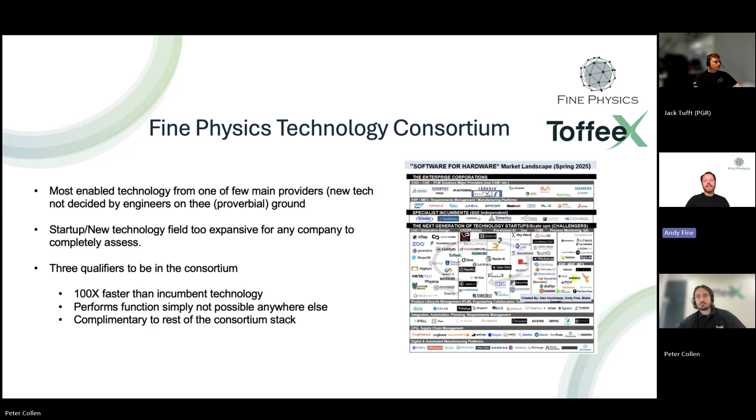And there's three qualifiers, which I'll be very clear about. A, it has to be 100 times faster than any incumbent technology; it has to perform a function simply not possible anywhere else, hence this is where ToffeeX fits in; and it has to be complementary to the rest of the consortium stack. So three very simple qualifying criteria for the consortium, and we at Fine Physics actually help curate some of this stack and cut out some of the noise within this.

So product development optimization. This is something that I personally have been working at for nearly 20 years. And I'm just going to guide you through this chart that you're seeing in front of you. So at the very bottom left, where we have an inefficient technique and small geometric design space, we've got make it and break it. This is what we've been doing since prehistoric times. Now, over the past 20, 30 years or so, we've done more and more work on direct physics modeling. So here, for a single design space, you can have a pretty efficient way of doing analysis using either CFD, FEA, electromagnetics, whatever it may be.

I'd say 10, 15 years ago, we were doing parametric optimization. So we were limited to maybe 4 or 5 parameters. You could optimize the system for a set of targets. Things have come on a long way since then. So we've been able to do reduced order models for quite a long time with multiple parameters, but you still need a lot of expertise for that. You can have a mid-design space, and the technique efficiency is okay.

Now, most recently, the last five or so years, there has been AI surrogate optimization. This is the deep learning side. Now, there you can explore a big geometric design space, but the efficiency of the technique is pretty poor, if I'm honest. You need a lot of training data and a lot of effort going into that.

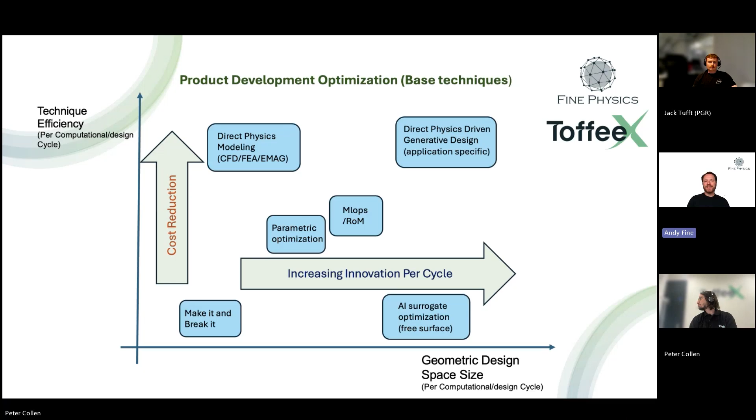And this is where we come in at the very top here, which is the direct physics-driven gen design, or the topology optimization, which we're going to go into here. Here you can have a large geometric design space, so many changes. You don't need to parameterize the system, and you can go through a significant amount of design iterations in a very short space of time. Hence, this is the area we're going to talk about here.

So just to look at a little bit of a breakdown of that, a little bit of a timeline here. So we went from making it, breaking it, to the empirical formulations, where we had Newton, Einstein, and so on. And it was really in the 1980s that we had the direct physics modeling.

This is when the codes were coming out of NASA and other bodies where you could actually do mathematical modeling, and there was enough computational power to actually do this. That led to parametric optimization at the end of the 90s and early 2000s, and that's the way a lot of things stayed. Whilst we boosted computational power, we could do a few more parameters and so on. And then in the 2020s, we had this AI boom and AI surrogates and so on, but we're coming kind of over the curve in that one.

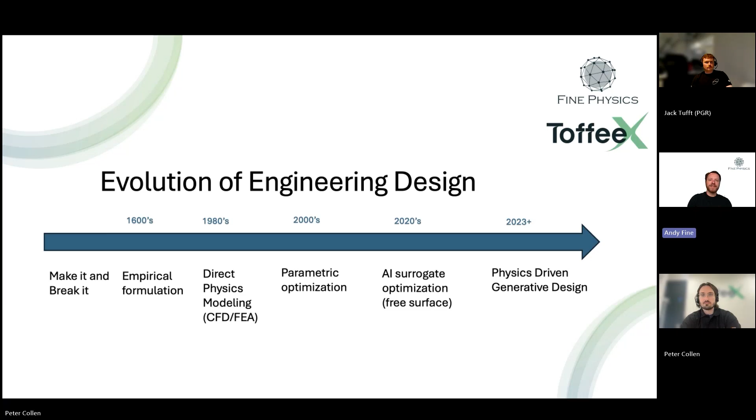So there's the hype of AI can do everything, and then the realization that you need to feed AI with a lot of data. And now, over the last few years, physics-driven gen design is really the way forward from this. It's been done in the structural world for quite a long time, and ToffeeX is bringing the CFD and thermal world into this. That's enough from me in the introduction.

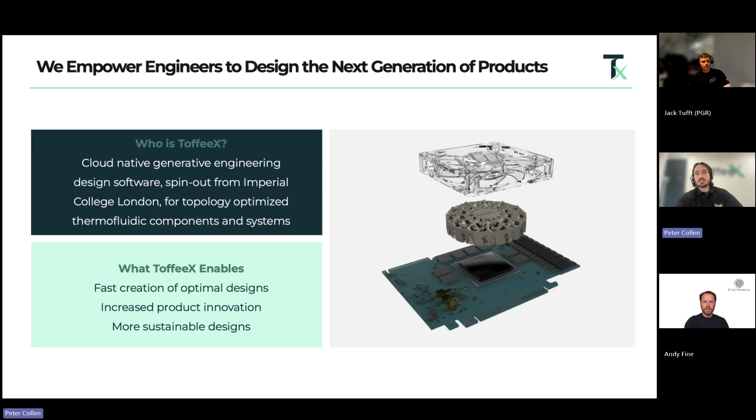Why is this advantageous? Well, it allows you to have optimal designs very quickly. It lets you explore the design space a lot more rapidly and fully because you can test out different design solutions more quickly. And it ultimately lets you have more sustainable designs because they become more efficient.

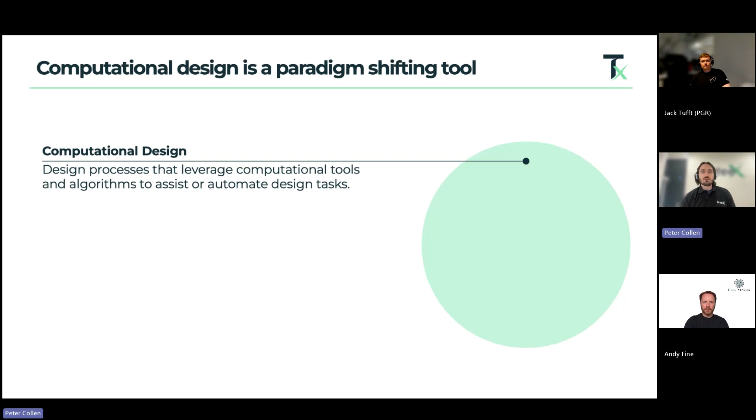Okay, so I want to talk a little bit about how ToffeeX works and where we fit in the landscape that Andy mentioned. This is how we see the world: there's the overarching computational design, which you can really think of as anything that uses computational methods to achieve a design. Within that, as a subset, is generative design, where either AI or algorithms can produce designs autonomously. So this takes the human out of the loop to an extent.

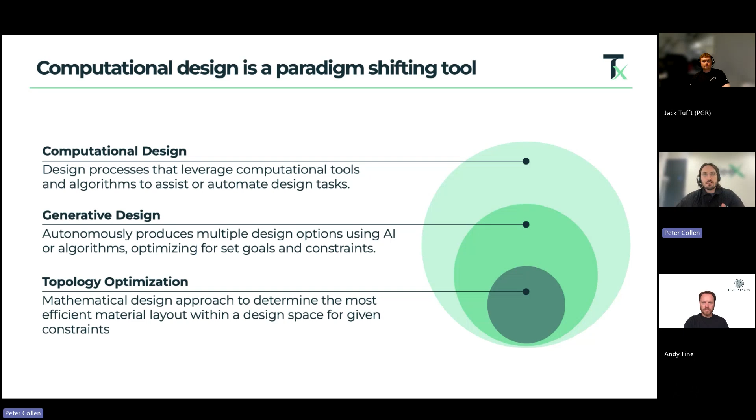And finally, we have topology optimization, which is a specific subset of this. So we have a mathematically based design approach, which gives you the most efficient material layout for a given set of constraints and objectives. And so this is where we sit. I find this can be a little bit abstract, so let's talk about how this works.

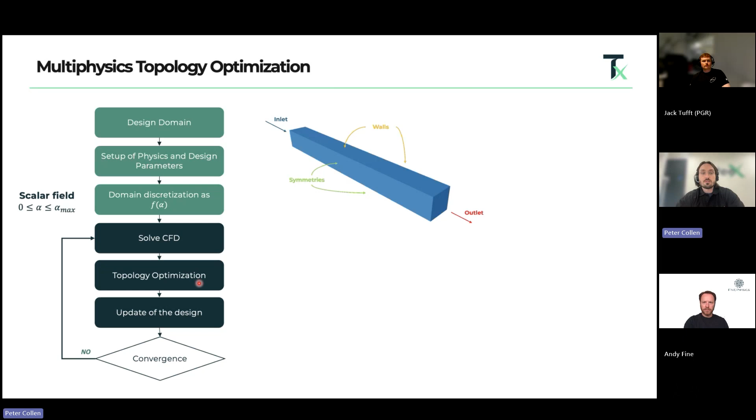You define a design domain and some physics and design parameters, so you can think of this as very similar to a CFD setup. Here we have a rectangular channel. We have an inlet and an outlet, a couple of heated walls, and then some symmetry planes. You discretize the domain, and it's a function of the solidity in the domain. Then we go through this iterative approach where we solve the CFD, build material based on that result, and then update the design. If we've not converged, we go around the loop, and if we have, we finish the design.

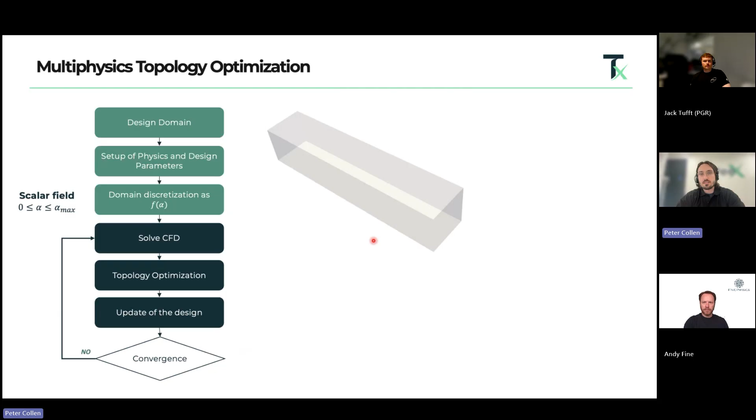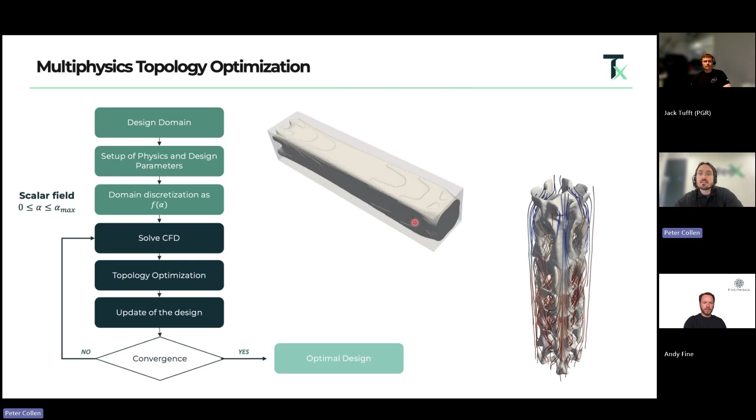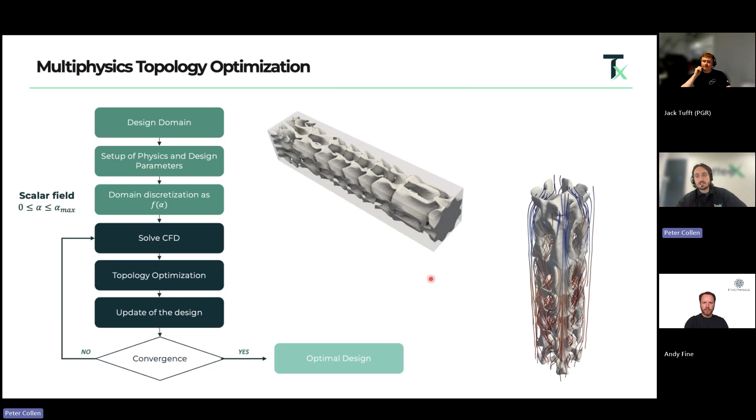So what does that look like in practice? This is a sped up animation of the design process. Through the course of the optimization, the solidity starts to find the optimal design, and it eventually converges to a final geometry. This probably took 15 minutes in computational time on our cloud, but here it's a couple of seconds. The advantage of this approach is it's CFD coupled to the design. So at every point you're solving real physics, getting a real picture of what's happening, rather than relying on interpolated models or training data.

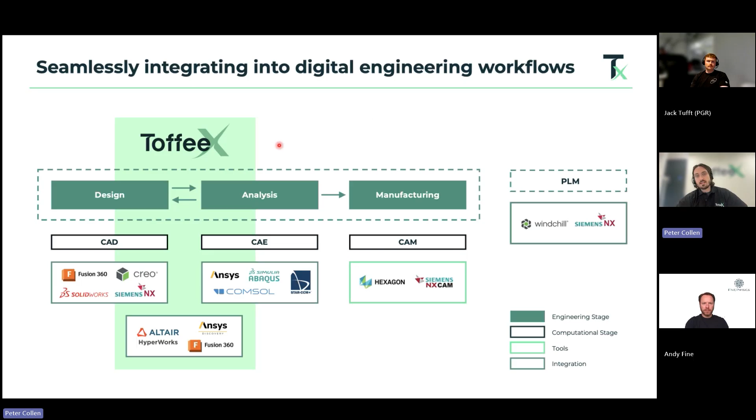We see ourselves as sitting somewhere between a design and a proper full analysis tool. In traditional design iterations, you might manually design something, put it into a CFD code like ANSYS or STAR-CCM+, see how it performs, then manually adapt the design and go around that cycle a few times. The purpose of ToffeeX is to break that iteration cycle, reducing the number of times you go around that loop, meaning you get to the best design more quickly, which ultimately saves you engineering time and speeds up your product getting to market.

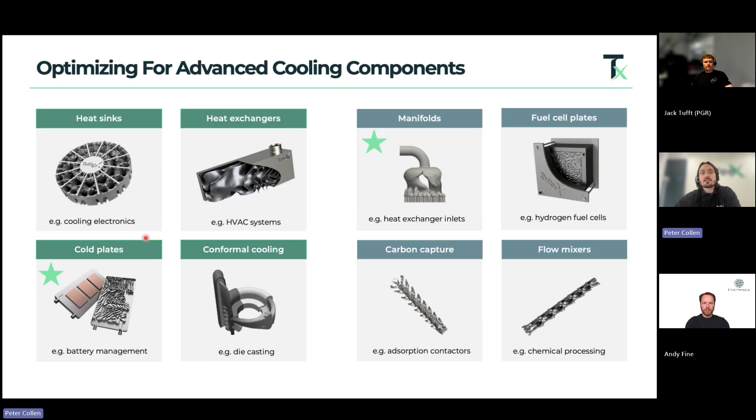But what I want to focus on today is maybe some applications that are of interest to the space industry. We do a lot of things, which is kind of what this slide is showing. On the left is applications that are maybe more thermally based, and on the right, maybe more pure fluid applications. And today, I'm just going to very briefly touch on cold plates for the thermal side, and then manifolds as well.

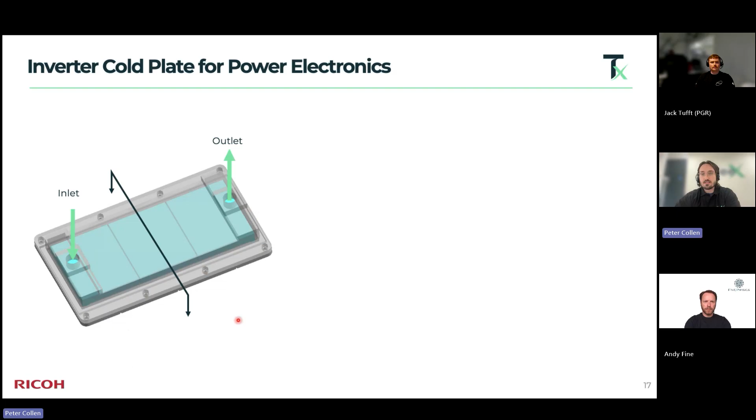So, quick example of a cold plate. This was something that was done recently with one of our partners, Ricoh. Flow inlet comes from the side, outlet on the other side. They essentially had a pin-fin heatsink that they made of copper. That was the baseline design. And what they wanted to do was to replace that with an aluminium design that they made through a 3D printing technique called binder jetting technology.

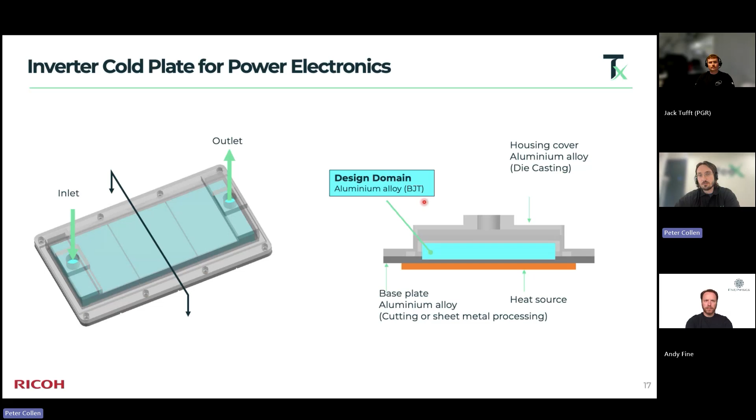So in ToffeeX, we define our design space. We built 3 main design spaces or sections above some heated chips. And the goal was to minimize the pressure drop and the temperature whilst reducing the weight. So based on your preference between how much pressure drop you're willing to trade off against temperature, that gives you a Pareto front of designs.

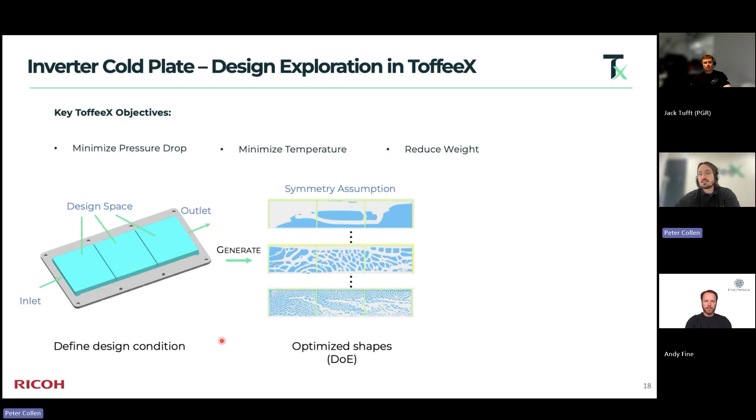And that's what this is showing here, 3 example designs where in this one, we're favoring pressure losses more than heat transfer. In the bottom one, heat transfer more than pressure loss. And then the middle is kind of a balanced design. So we take this balanced design forward. It was manufactured using the technology, and they managed to actually experimentally test these.

So what you see here is that the copper design has this amount of thermal resistance, but it's obviously quite heavy, being about 3 times as dense as aluminium. If you were to make the same pin-fin design out of aluminium, you see that the weight drops quite a lot, but the thermal resistance goes up because it's less effective.

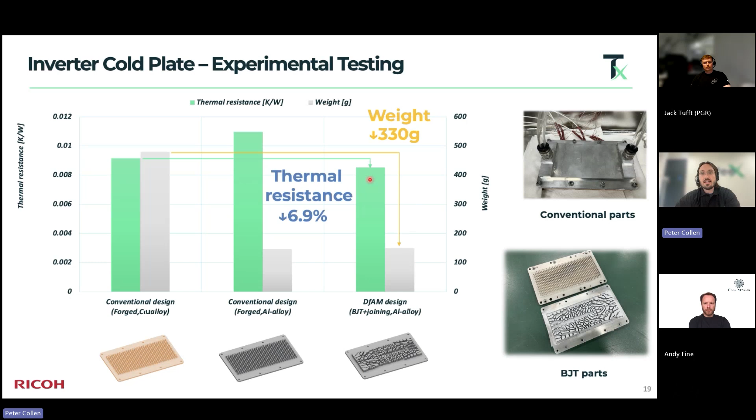Finally, with the ToffeeX design, the weight is about the same as swapping the previous design to aluminium, but we get actually a reduction in thermal resistance. So a huge weight decrease and actually a performance increase as well. So a very good result. You can see it on test up here.

Okay, very brief examples of some manifolds. So this is a die cast manifold we've worked on previously. The incumbent design, you can see here, it's 4 inlet pipes leading to 1 outlet. The main issue was this pretty significant velocity non-uniformity on the outlet face. So again, using ToffeeX, in this case, optimizing for improved velocity uniformity and reducing pressure drop, we arrive at this design on the right, which is about 60% lower pressure drop and much more uniform velocity on the outlet face.

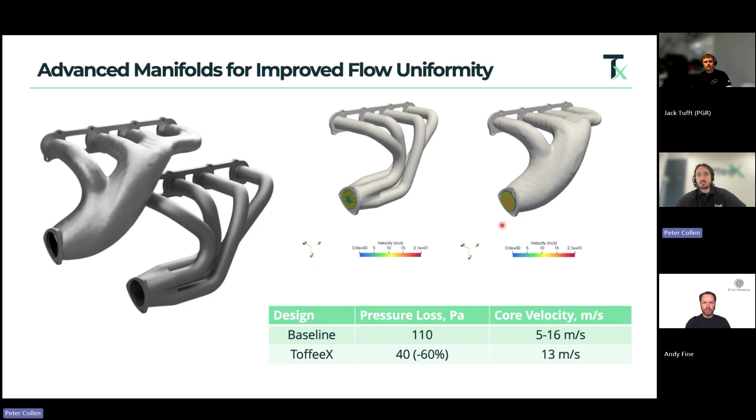So a good result. This second application for the manifolds is actually the subject of a previous webinar, but I really like it because what we're doing here is optimizing the header of a shell and tube heat exchanger. What happened previously was the flow would come in through the top. It obviously goes straight through these middle tubes. The outer ones were being ignored or not receiving as much flow. With a ToffeeX design that was additively manufacturable, it achieved much more uniform velocity.

And what it actually did was, just by improving the velocity distribution, improve the heat transfer in the core by about 15%. In some applications, where you have a really advanced heat exchanger you've worked on for ages, you can use ToffeeX to just eke out that last bit of performance that you really need to make your design. So yeah, just an extra interesting use case, I think, for the manifold design there.

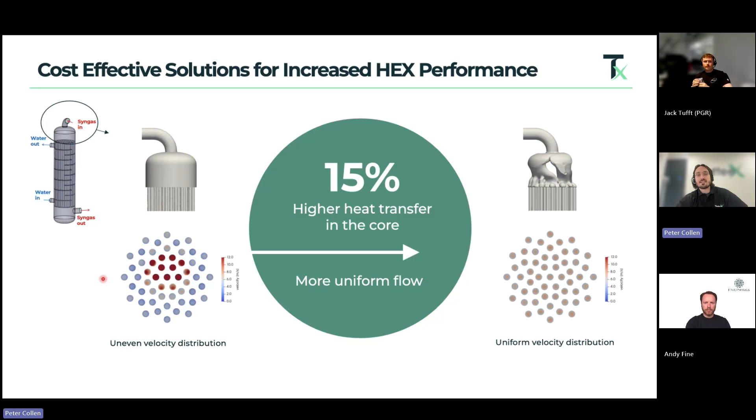Right. The focus of this talk is the rocket nozzle work we've done. So I'd like to briefly introduce Jack Tufft. He's a guest speaker. He was working on this project as part of his PhD at the University of Glasgow. Jack, maybe you could just say a little bit about yourself and about the project, and maybe tell us what regenerative cooling is. Yeah, cheers for the short introduction. So yeah, my name's Jack.

I'm focusing on regenerative cooling optimization in my PhD back at Glasgow, and rather than focus on parametric optimization, I really wanted to do something a little bit more left field, look at generative design and different methodologies. But now I've paused my PhD for a short break to work in industry, so I'm working at a company called Orbex. Orbex is a launch service provider based in the UK, and I'm based in Copenhagen because that's where all

the propulsion activities are. But for anyone that doesn't know, regenerative cooling is essentially where we use the propellant of the launcher to cool the rocket engine, and it's the most commonly used cooling methodology in propulsion systems. You've got combustion temperatures of about 3000 Kelvin, huge convective heat transfer. So what you're doing is passing that propellant down to the bottom of the nozzle and then back up towards your injector. So it's dually beneficial: you're not only keeping everything within a thermomechanical limit, you're also keeping that energy within the system and absorbing it within the propellant. So without getting into it too much, I hope that kind of covers it, Pete.

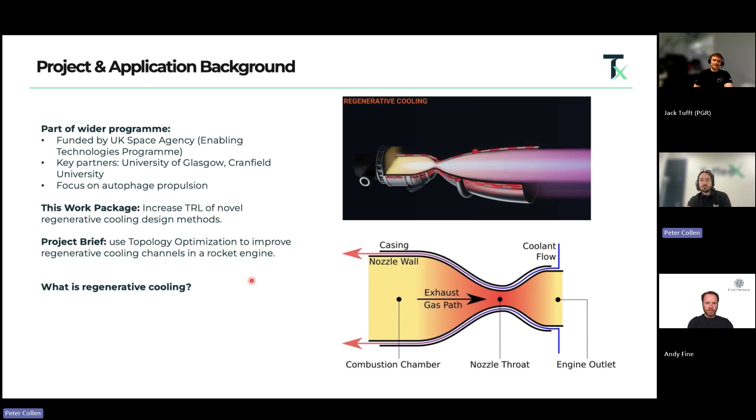Nice. Okay. So I'm just going to briefly talk about how we'd set this problem up in ToffeeX, and we took two approaches. The first is a 3D design approach, so taking a segment of the nozzle. An advantage of ToffeeX is that you can constrain regions to be either not built in, to be built in as part of the design process, or to be completely solid. And if you model stuff as completely solid, then you account for the conduction as well. So in this case, this is a section of the nozzle. In red is the solid wall constraint, basically the inner casing of the nozzle. Jack, roughly what thickness is the wall of the nozzle? 1 mil. Okay, so it's about 1 millimeter thick, so it's quite a thin domain.

The nozzle flow in this diagram is left to right, and then the coolant flow is right to left. So the flow comes in from the right to cool it. We have an inlet and an outlet for computational stability, which we don't build in, and then we have the design domain up here. As Jack mentioned, the heat fluxes can be really high. They grow up towards the throat. Do you know roughly what the orders of magnitude of these heat fluxes are, Jack? Not quite the same as that graph. We're talking about at least an order of magnitude higher at the throat. As you're going from left to right with the flow of your combustion gases, as that reaches the sonic condition at the throat, that's where your heat flux spikes.

And do you ever get nozzle ablation? Is that a problem in rocket nozzles? Yeah, very, very common. That's why you've got to be really on the ball with your cooling. Okay, makes sense. And just for context, what do existing designs look like to solve this kind of cooling problem? Typically you've got just straight channels going from the base of your nozzle to the injector, but you also see helical channels that spiral up around the nozzle as well. Essentially you've got more heat pickup, so you've not got as effective cooling because your propellant is heating up, but you have a longer path per axial distance.

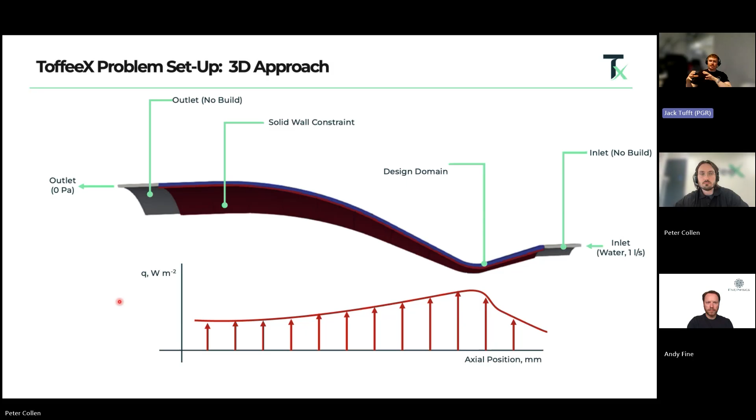Yes, so it's partially because it's at sea level, also because our chamber pressure is very low. With your expansion, you are essentially taking your combustion chamber pressure and then expanding it to whatever condition you want. I wanted to make these engines as robust as possible, so really low chamber pressure. But since this is a test bed engine, it has left us with a nozzle contour that doesn't look very rockety, is probably the best way to put it.

I mean, I feel like if it fires propellant out at the end, it looks pretty rockety. It does indeed.

But I suppose a feature of that is even though the heat flux is highest at the throat, the water is very cool because the outlet isn't that long. So we might expect with a bigger nozzle, you'd have a lot more construction of fins at that point. Is that fair? Exactly. I think one thing that we were kind of surprised to see when we were doing this, Pete, is that we saw a lot of these features go towards the injector side on the left-hand side.

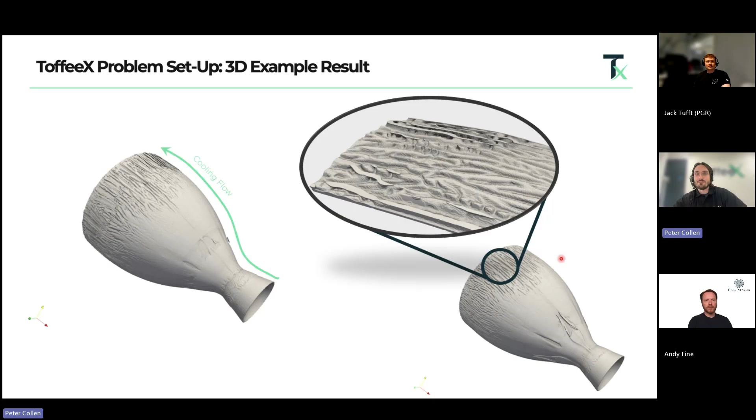And that's actually just because our propellant, these are water-cooled engines, was heating up so much. Where the fluid actually needed to do the work was by the injector rather than at the throat. So that was quite interesting. Yeah, I suppose it slows down quite a lot as well coming in. It has to expand out, the velocity drops. Yeah. It was good to see that it follows the physics of that happening. You can get a sense of why these designs are being created and the physical reasoning behind it.

Okay, so the other thing we tried was a 2D approach. The previous design I just showed probably took about 10 hours on 16 cloud-based CPUs, which is slightly less than our customers would normally have. This one is more on the order of an hour to do in 2D, so it allows quicker design iteration. So on this, we took this 3D design slice, mapped it to an equivalent flow area.

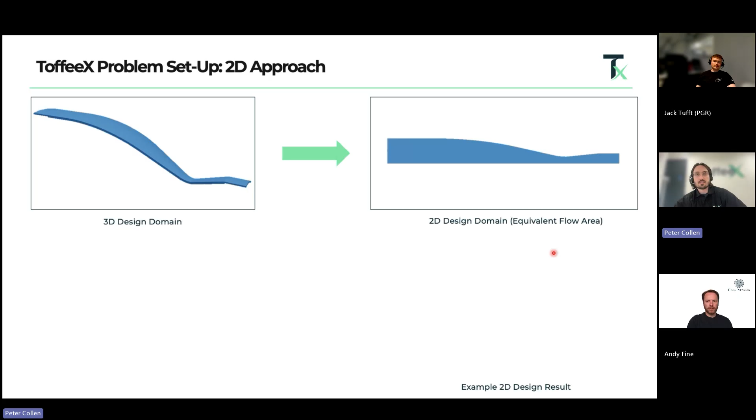Obviously, as you're going out radially, the area increases. So accounting for that in this equivalent area 2D design, then using ToffeeX, come to a 2D solution. And then we remap that and rotate it back to the 3D nozzle and validate it in 3D to check that the design still works.

Maybe a question I should have asked you sooner, Jack, is, considering this and the 3D optimization, are there other tools you thought about using for topology optimization? What do you think the blockers are to those being used successfully in industry? Did you find that ToffeeX was particularly useful for this case?

Yeah, so just before we started working together, I also did topology optimization of an example microchannel heat sink with that variable heat flux to mimic a rocket engine, just as a very first case. I used COMSOL Multiphysics for that application, and I did a short intensive course on topology optimization, and only after months and months of trying to get this model to work, with academics who already had other models helping me along, I actually managed to get those results. Structural topology optimization is certainly a lot simpler, but as soon as you move into the fluid domain, it's exponentially more difficult.

Yeah, and I guess that was like text files, terminals. Yeah, COMSOL Multiphysics is still quite user friendly. There are modules built in for it, but I think the focus of that, certainly from the last time I used it, was more of a structural application. It does work. I still managed to get it to work for the fluid stuff, but it was difficult.

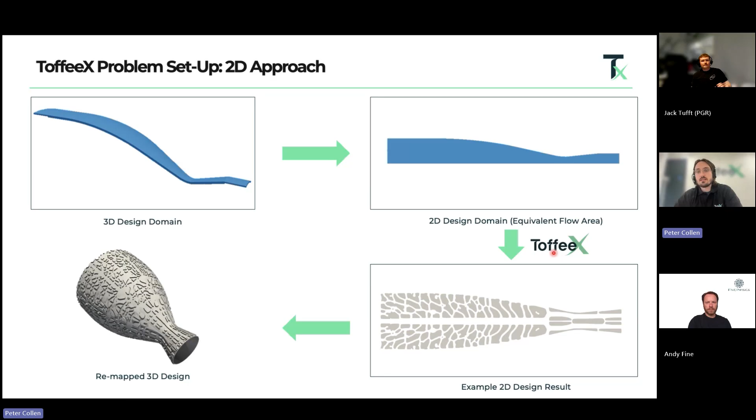Yeah, that makes sense. Okay, so here are some example designs, or the final designs we got to. This is the simulated conventional design, as Jack mentioned, with straight cooling channels. It gets very hot at the outlet based on that expansion of the flow, reaching a max temp of about 440 Kelvin. You can see that the 2D design has about the same pressure loss, but is much cooler. And the 3D design that we arrived at was slightly higher in the pressure losses, but much colder as well.

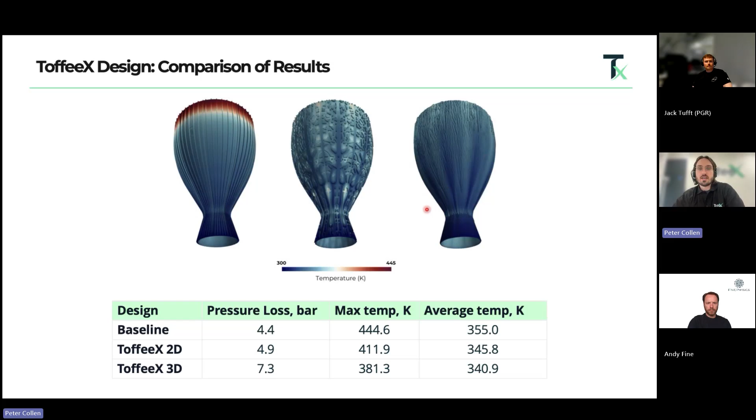So depending on the design requirements and how you want to trade off those results, designers can make decisions about where they want to be on that Pareto front, what design they want to take forwards. But overall, I think a good result, good performance found with ToffeeX, and some promising reductions in temperature.

Jack, I can't remember, was this scaled down or is that full scale? I think it was to scale. Yeah, I think so. Okay, yeah, so a full scale nozzle. Good question, actually. Not sure. Yeah, I mean, it's just the display one, so I guess it's less critical.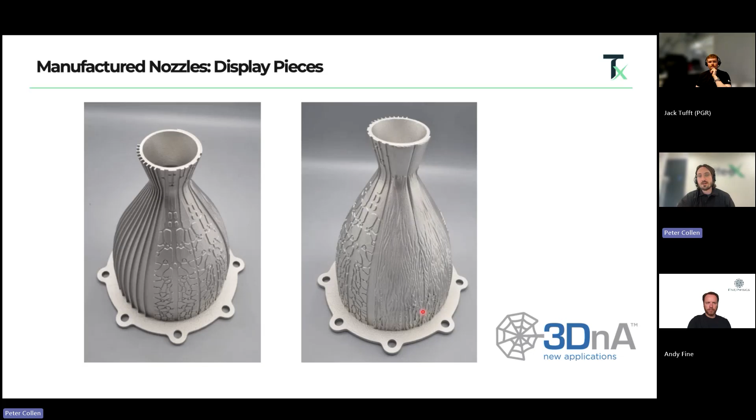Sure thing. So we had three chambers printed, all for the straight channel, 2D and 3D topology optimized results. So TORC, topology optimized regenerative cooling, 1, 2, and 3. And these were printed out of a material that's quite common in rocket engines called copper chromium zirconium. So it's kind of high strength, high thermal conductivity material. And these are all water cooled.

So we kind of wanted this to be a first step in the TRL increase of doing this kind of thing. We didn't want to just jump straight to using propellant. With the water cooling, we can adjust that on the fly if we're seeing thermals that we don't expect. But these are all tested at MachLab. So it's a University of Glasgow project that's been going on for a couple of years now, and the site's now fully commissioned. Unfortunately, there's no hot fire videos, that's all getting released in the next couple of weeks as a big media package. But it's a cryogenic, so liquid oxygen and kerosene facility based in Scotland.

Nice. And just for clarity, we obviously don't see the internal structure as we did on the display pieces because it's got a casing, which makes sense. We don't want the coolant flying out. What are these sort of ribbed lumps with the holes? Yes. So they're thermocouple ports. So they're not wetted thermocouples. They're dry.

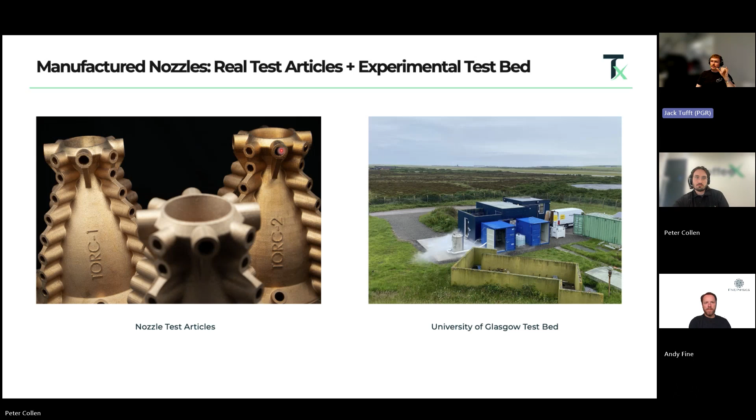But on each of the, it's quite hard to see, but underneath TORC 2 there, you can see that water cooling outlet manifold. And then the one directly above that, that's the water cooling inlet. And so there are wet thermocouples. So then we can correct for that temperature distribution across the axial length of the nozzle. We've also got 2 pressure sensors in each of the manifolds as well. Yeah, I think that's all of it.

Yeah, so the 2D one performed very well. So it was a 25-second long duration burn, but there was a number of different tests done. Time was a bit tight, so they didn't manage to test the 3D one, but that'll be coming in the coming months as well. Amazing.

But yeah, I guess maybe as a summary, we've used ToffeeX to develop 2 advanced designs for these regenerative rockets in a 2D and a 3D sense. Both of them have reduced the temperature of the nozzle wall significantly, and they've been manufacturable and testable, which I think is a really key outcome. You can have some of these pictures be really pretty, but actually having something that you can build, test, and doesn't blow up is quite a nice outcome, I think.

Sorry, what's the rocketry term? Rapid unscheduled disassembly. Yes. Okay. Thank you. Sorry, that's the limit of my technical knowledge.